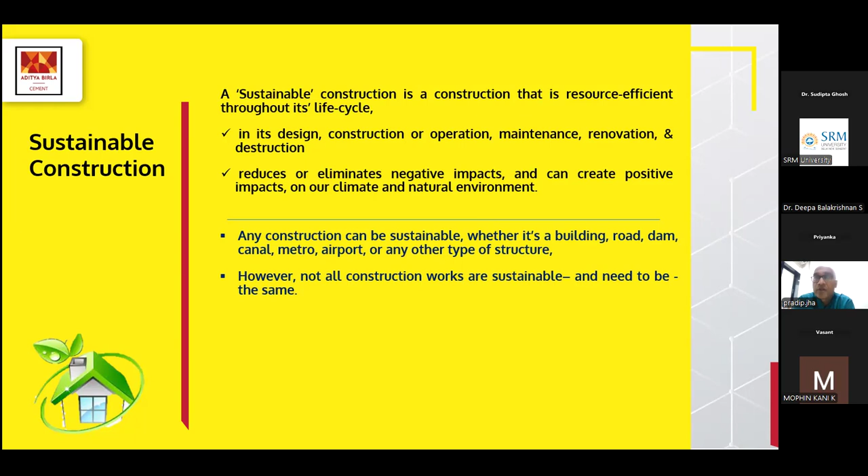Any construction can be sustainable, whether it is a building, roads, canals, metros, or airports—whatever construction we do, it can be sustainable. But it is not necessary that all the construction that we do has to be sustainable. So that is the key point.

The third point is, sustainability is very subjective. So what is sustainable in the Northeast may not be sustainable in the coastal areas. What is sustainable in India may not be sustainable in any other part of the world. Every part of the world has distinctive climatic conditions. They have unique cultures, their traditions are different, and their construction types are very different. Their exposure to environment is very different. Their economical and social priorities are different. And that is how sustainability gets impacted when we change locations and when we change places.

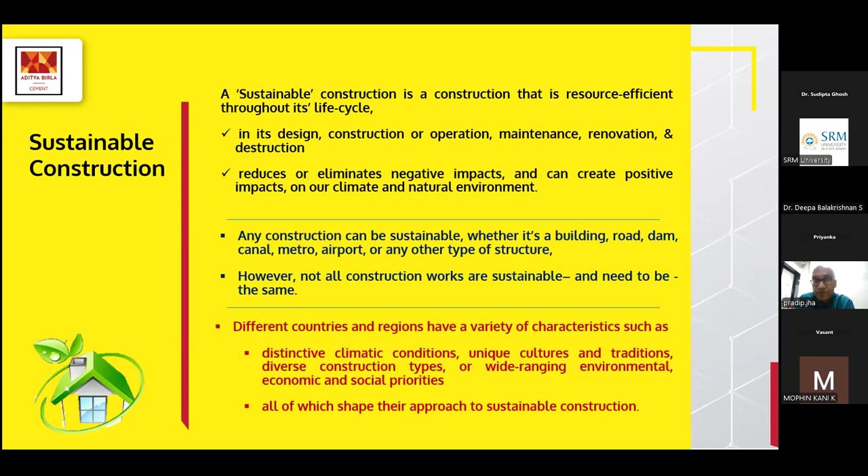These are the basic principles of sustainable construction. Whenever we speak of sustainable construction, the prime motto is that it has to have a very positive impact on the environment. The natural resources we use for sustainable construction have to be efficiently and judiciously used. If we can make use of resources efficiently, it culminates into sustainable construction.

When we speak of sustainable construction, we have to speak of a life cycle approach. When we design, it has to be sustainable in our mind. When we construct, the sustainability factor has to be crept into it. When we are operating with those structures, living with them, it has to be sustainable. So from design to demolition, every stage of the life cycle has to be sustainable.

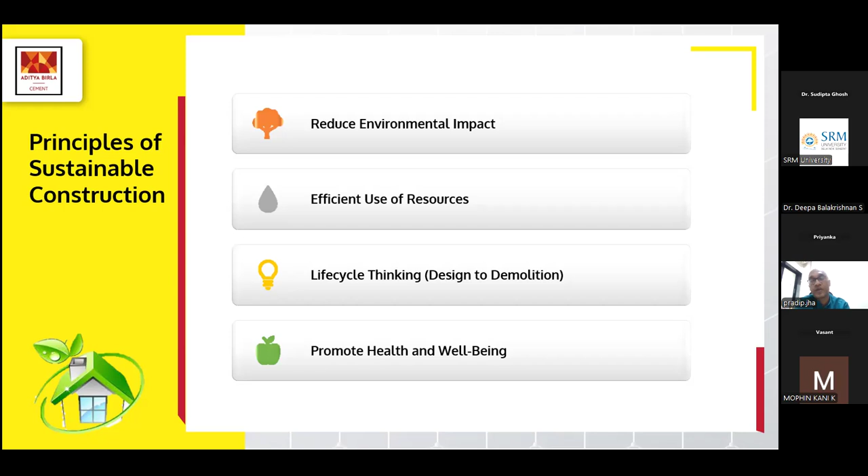Finally, for the ones who are using it and the surroundings, sustainable construction needs to promote health and well-being of the occupants as well. So when you build a green building or sustainable roads, whoever the users are, their health, wealth, well-being and safety come into paramount importance.

So these are the triple bottom lines, and this can't be negotiated. When we speak of sustainable construction, it has to reduce waste, it has to reduce emissions, and that is how it has a positive environmental impact.

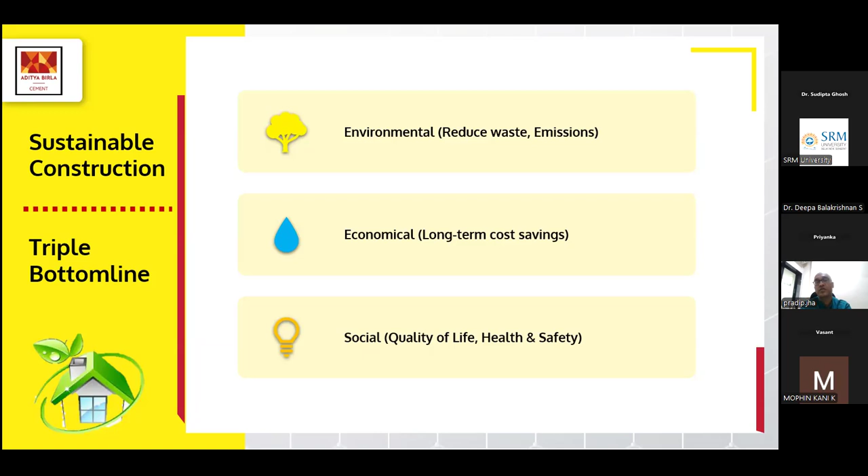In the long run, if it is not economical, it doesn't make sense. So sustainability has to be socio-economical. The social aspect implies the social structure, the quality of life of society, and the health and safety of occupants. And economical means it has to have some sort of savings, which can come in terms of many factors. So these are the three bottom lines: environmental, social, and economical. These three bottom lines have to be considered when we speak of sustainable construction.

Now, since we are civil engineers, we are into the construction industry. What is the impact that the construction industry is doing to the environment today? Let us have a look at it.

There is a forum called World Watch Institute, and this forum says the construction industry consumes 40% of the world's raw stones, gravel and sand. The construction industry consumes 25% of the virgin wood per year. Similarly, for energy and process-related carbon dioxide emissions, the construction sector is responsible for 39%. That is very huge. And of the waste produced, 59% is construction and demolition waste.

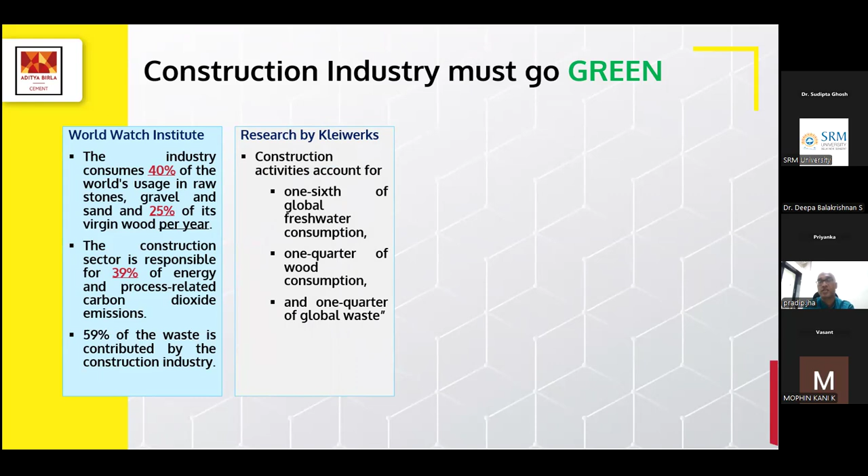This is what World Watch Institute says. Other research by Kleiwerks says that of whatever fresh water we have, 16% of global fresh water consumption is being done by construction activities. That's very huge—when we are deprived of fresh drinking water, 16% goes to construction activities. 25% goes to wood consumption, and 25% goes to global waste.

Now, this construction blog data shows that of whatever air pollution we have, 23% comes from the construction sector. The construction sector contributes 50% of climatic change. Drinking water pollution again 40%, and landfill waste is 50%.

Just a minute, I think I have... is my screen visible? Yes, sir. Where has my screen gone? I'll just reshare again. I think it's visible now. No, sir. Now it's visible, sir.

Visible? Construction industry—again, the US Green Building Council says the construction industry accounts for 40% of worldwide energy usage, and it is going to grow every year by 1.8%.

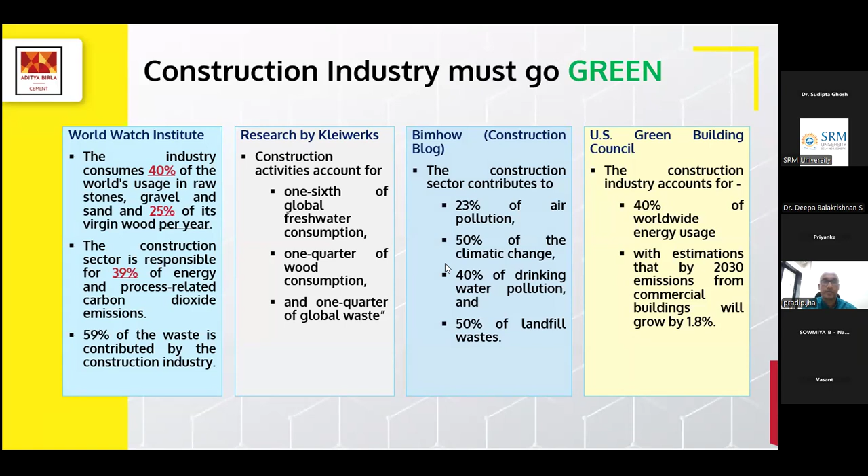Now, we are into the cement industry, and cement contributes a lot to construction, so let us have a perspective from the cement industry. India has an installed capacity of 590 million tons, while the world has almost 4.2 billion tons. We are the second largest cement producer in the world after China, contributing 7% of global installed capacity. Our per capita cement consumption is only 250 to 270 kgs, whereas the global average is 500 to 550 kgs, and China accounts for 1750 kgs.

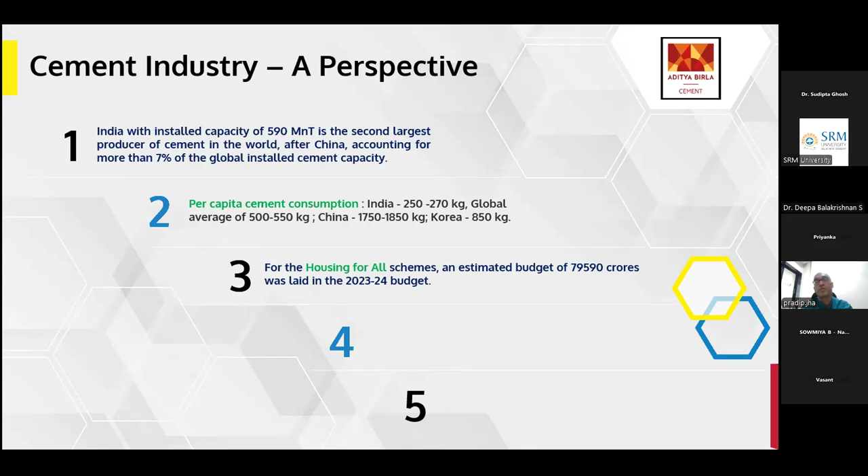If you see the budget every year, there is a huge allocation for construction activities by the government. Housing is one of the sectors—affordable housing is one of the sectors. So housing for all is Pradhan Mantri Awas Yojana Urban, and similarly you have Pradhan Mantri Awas Yojana Rural, with a huge amount allocated to this.

And we all know that for every ton of cement produced, 1 ton of greenhouse gas emissions is released. Also, for every ton of cement we produce, around 6100 megajoules of energy is consumed. So that is the amount of energy and resources that cement consumes.

There are many improvisations in cement manufacturing. Supplementary cementitious materials, industrial byproducts which have cementitious properties, are being used, and fly ash is one of those. Around 58 million tons of fly ash was used, and the contribution of slag in cement production has now increased to 57%. We have slag cement, composite cement, amendment number 1 - these use fly ash and slag as well. PPC is only fly ash based. So these two blended cements make use of industrial byproducts for the betterment of the environment, for making cement greener.

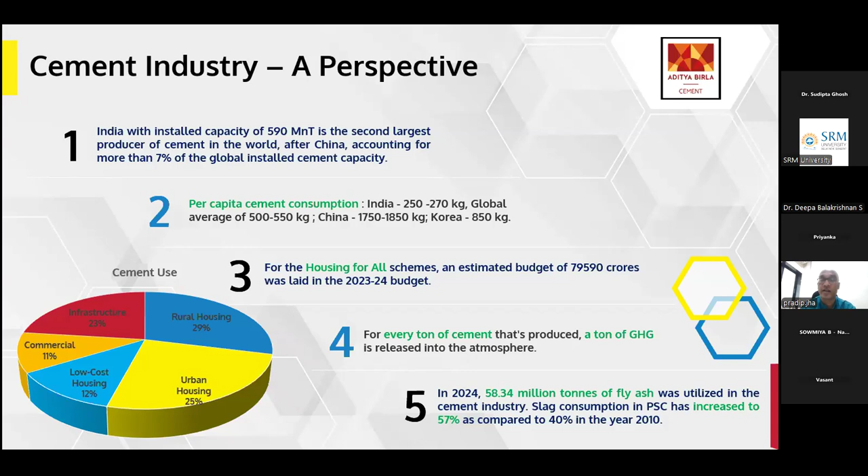Where does the cement go? Rural housing accounts for 29% of the cement used, urban housing 25%, and low-cost housing 12%. So in the housing sector alone, around 66% of the cement is getting used. Apart from that, there are commercial buildings and infrastructure projects as well.

When we speak of cement, we say concrete. Concrete is the second largest material used, and every construction that we think of comprises concrete. This is the scope of concrete, and it's very huge. This is just a context setting of why sustainability in civil engineering matters.

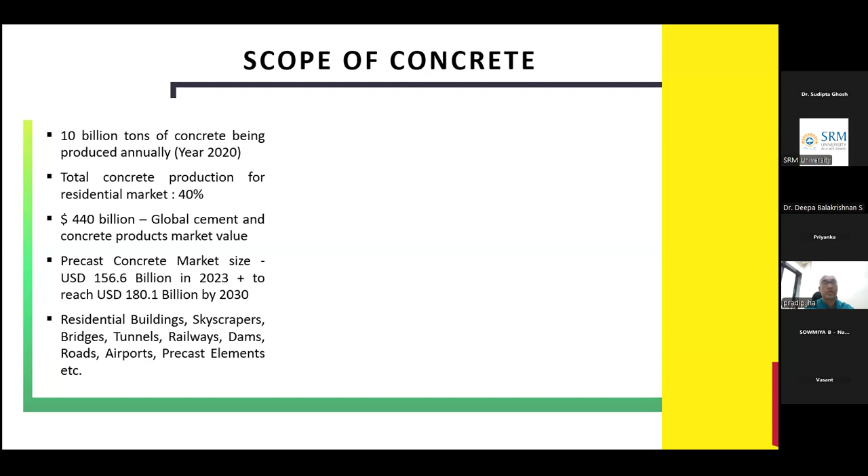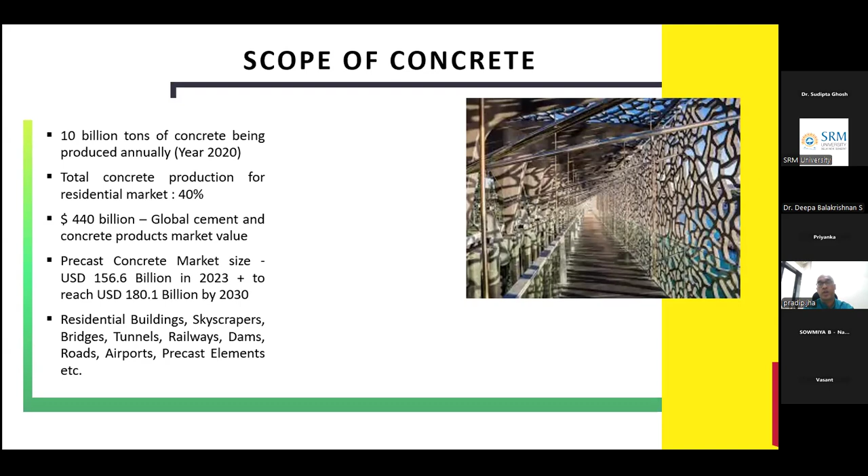Concrete today, there are many types coming into picture - precast concrete, value-added concrete, and the concrete industry is getting bigger and bigger. Concrete production is getting very huge, and later in the slides we'll see the volume coming into picture. There are different types of concrete we produce for our structures - it could be precast concrete, concrete over bridges, concrete in a modular shape, or concrete with an entirely aesthetical look.

Water is again one of the prominent ingredients used for construction, and if we speak of sustainability, we can't ignore water. In the next 15 years, India will witness around 30 billion meter square of construction area in urban areas alone.

RMC plants in India normally produce 100 to 120 million cubic meter of concrete per annum. This is only 10% of the concrete that we use, so the total must be around 1,000 to 1,200 million cubic meter of concrete per annum. For these RMC plants, we require 35 to 42 billion liters of water for that 100 to 120 million cubic meter of concrete. So total water requirement in concrete alone in India is 350 to 420 billion liters per annum.

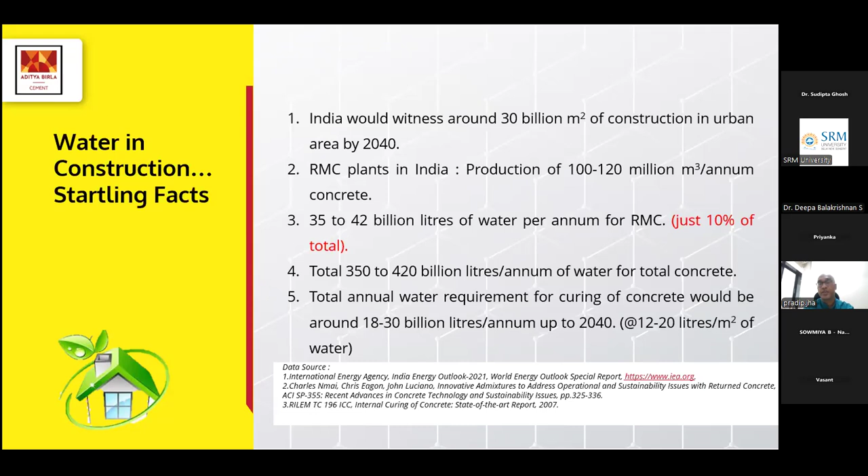This is only for making concrete in RMC. We also require water for curing of our construction - I'm speaking only of curing of concrete, and that is around 18 to 30 billion liters per annum that will be required in the next 15 years. So this is the amount of water we are using for construction every year. There were three things I wanted to bring here - cement, concrete, and water in concrete - and these are very startling.

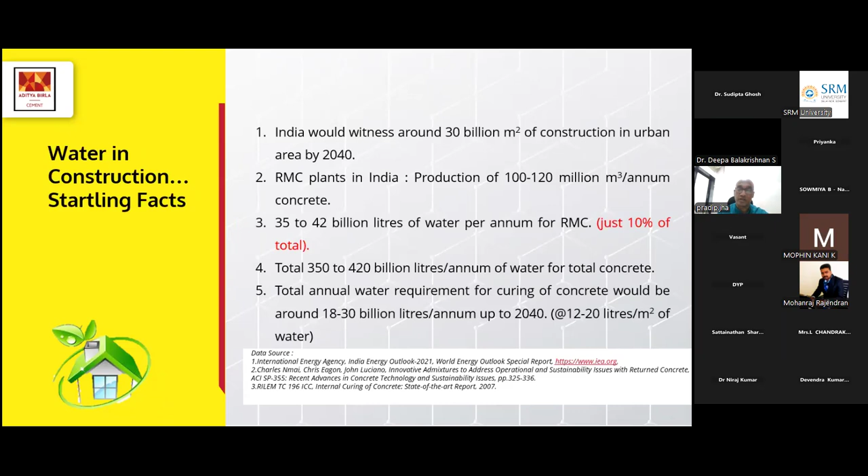When I speak of sustainable construction, I'll focus more on green products and materials - cement is one of those, and concrete today is a product itself. There are also many building products that have come into picture, which I'll speak on as well. The second part would be green practices - what makes my construction green and sustainable, like rainwater harvesting, solar energy, energy efficient designs, and construction demolition waste. Finally, we'll speak of green buildings, since buildings are one component of sustainable construction, and how we promote IGBC certification in different categories.

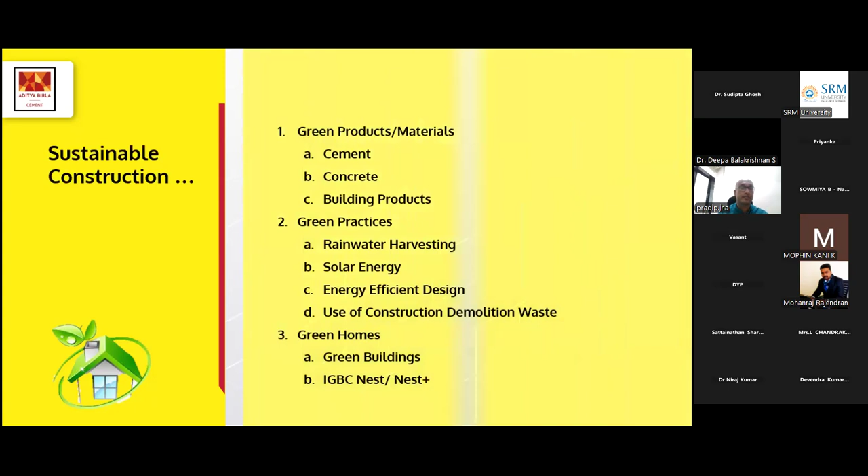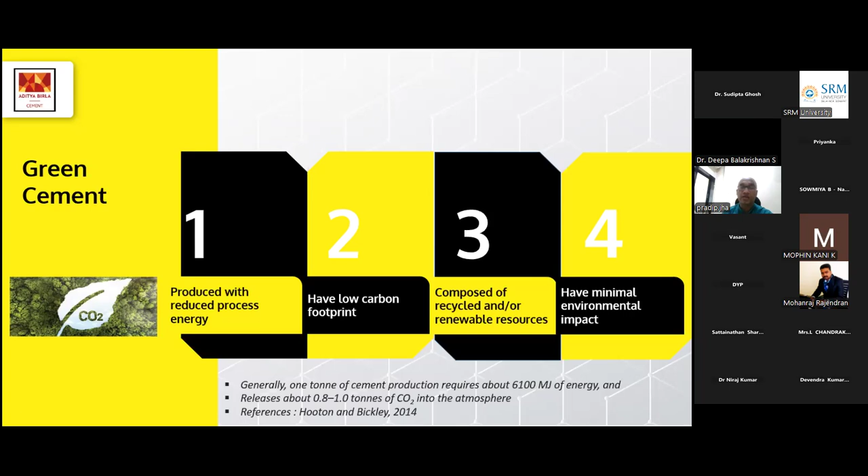By green cement, we mean cement produced with reduced process energy. I've already said 1 ton of cement requires 6100 megajoules of energy and releases about 0.8 to 1 ton of CO2 into the atmosphere. Green cement is cement with a low carbon footprint, composed of recycled and renewable resources, which have minimal environmental impact. When you use blended materials, blended cement, supplementary cementitious materials, or alternative sources of fuel, you make green cement.

Now, why we say Ultratech cement is a green cement? Because we are 5x water positive. That means whatever water we consume in producing cement, we conserve 5 times more than that. We reuse, we recycle the water 5 times whatever we use. We are also plastic negative.

So when I say plastic, what happened? This plastic negative means we don't produce plastic, but we use plastic as fuel material and in every other thing that we use. That is why we are 2.8x plastic negative.

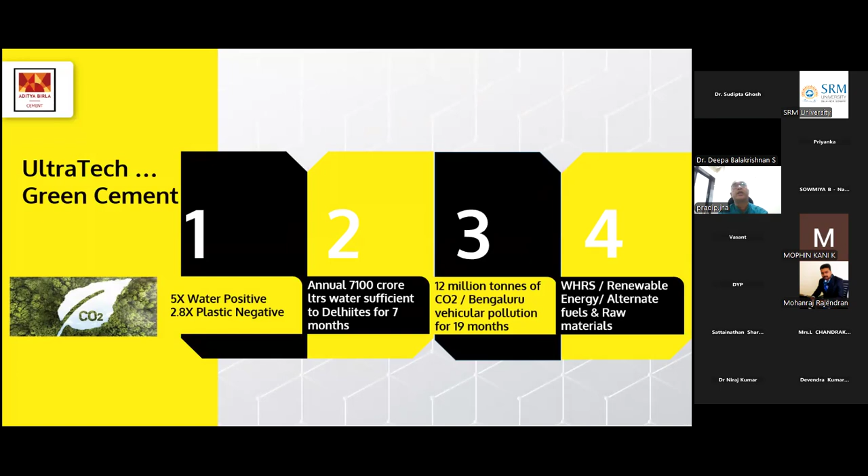Now I'll tell you the amount of water that we contribute to the society. Every year we preserve, we harvest 7,100 crore liters of water. And what does that amount to? For the entire population of Delhi, whatever drinking water they require for 7 months, this 7,100 crore liters of water is sufficient.

Similarly, we reduce carbon dioxide emissions to the tune of 12 million tons. And what does that amount to? Entire Bangalore's vehicular pollution, whatever emission they do for 19 months, we reduce that emission every year, every 12 months.

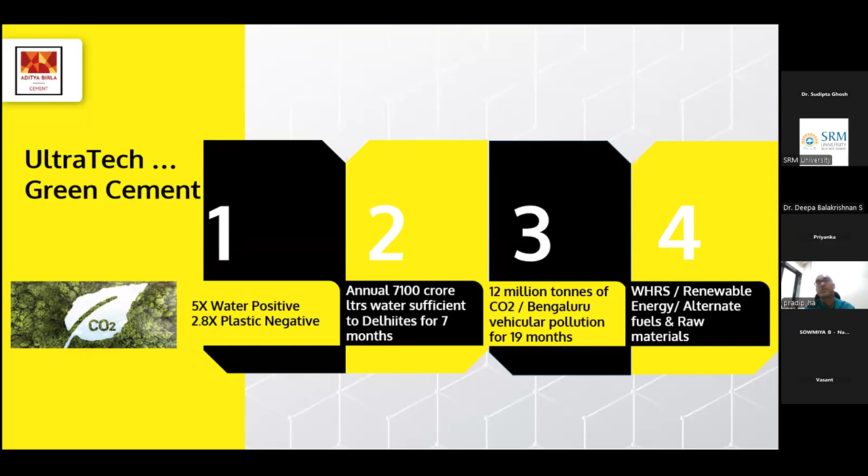Now, we are energy sensitive, we are very energy efficient, and for that we have waste heat recovery systems in place. We have renewable energy in place, use of renewable energy in place. We make use of alternate fuels, and we have alternative raw materials as well. That is why we say we are green cement. Today, whatever cement we produce, 70% of the cement is green cement.

Again, I'm speaking of concrete. So when I speak of concrete, I say ready-mix concrete. And ready-mix concrete is green concrete. Why? Because obviously it makes use of efficient resources.

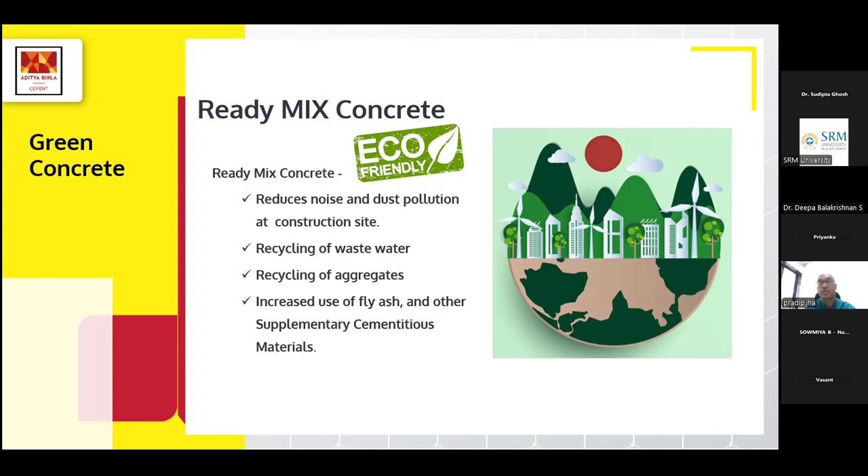So ready-mix concrete is normally designed concrete. You put into place concrete mix design principles, and that is how you optimize the resources that you use. Secondly, you recycle wastewater and use that water there. Third, the aggregates, at times you recycle aggregates and then use them. You make use of supplementary cementitious materials, and that is engineered. Also, the noise pollution and dust pollution at the construction site gets reduced.

So that is how ready-mix concrete is green concrete. Now, this is again why I'm saying, obviously, as civil engineers, when we are commuting, we see many transit mixers on roads. That is an indicator that today ready-mix concrete is gaining pace very quickly. It is gaining acceptability in a wider way, from all the corners.

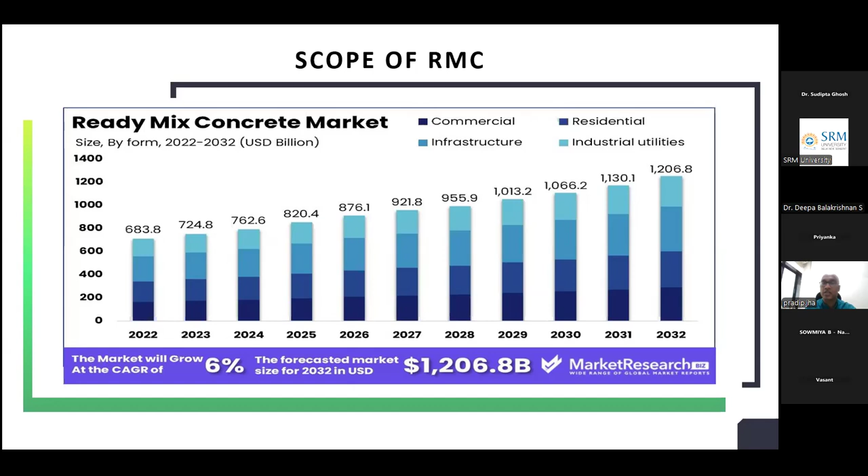Initially, only institutional customers used to make use of ready-mix concrete. Today, even a normal house builder, a normal citizen, when they want to make a house, they ask for ready-mix concrete. So this market is getting huge. You can see in billions how the size of ready-mix concrete is growing day by day, month by month, and how it intends to go ahead. So in 2032, 7 years down the line, it is projected to be a market of $1,206 billion. And it is being used in commercial, infrastructure, residential, industrial utilities, and many more.

So when we say ready-mix concrete, there is one more concrete, not only ready-mix concrete. Concrete normally we say is against the environment, but we saw the importance of water, why the water needs to be preserved, why the groundwater should be prevented from depleting.

And that is where this pervious concrete comes into picture. So we design concrete to let water go inside. Whenever you want to design your patios, your walkways, pathways, you make pervious concrete so that it suffices the need of concrete, and simultaneously it allows the groundwater, surface water to percolate inside the local land, avoiding any depletion of the groundwater table.

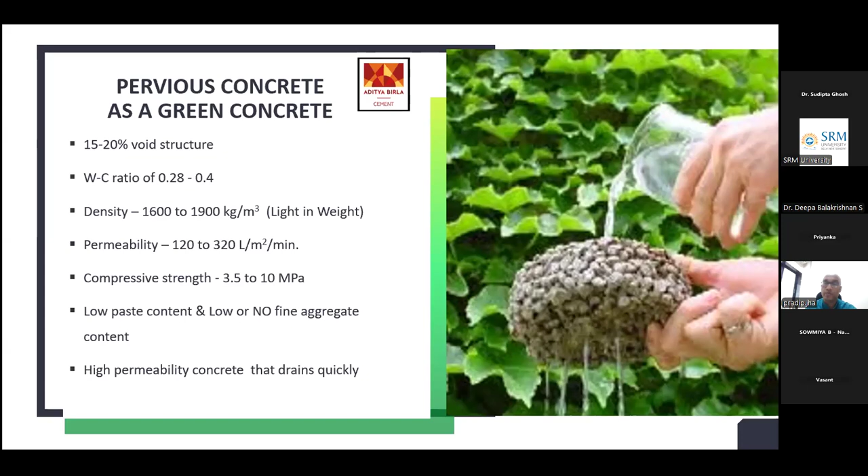So I'm not going into technicalities, but this concrete is designed to let water permeate in the ground. A small video.

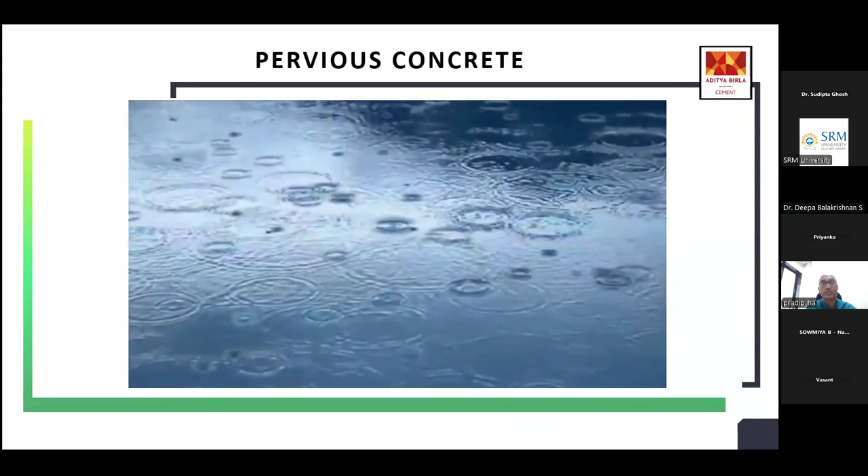Stormwater runoff occurs when rain falls in urban areas. This runoff can cause increased pollution in rivers and streams, flash floods, and loss of rainwater that replenishes the water table and aquifers. By capturing rainwater and allowing it to seep into the ground, pervious concrete is instrumental in recharging groundwater and reducing stormwater runoff.

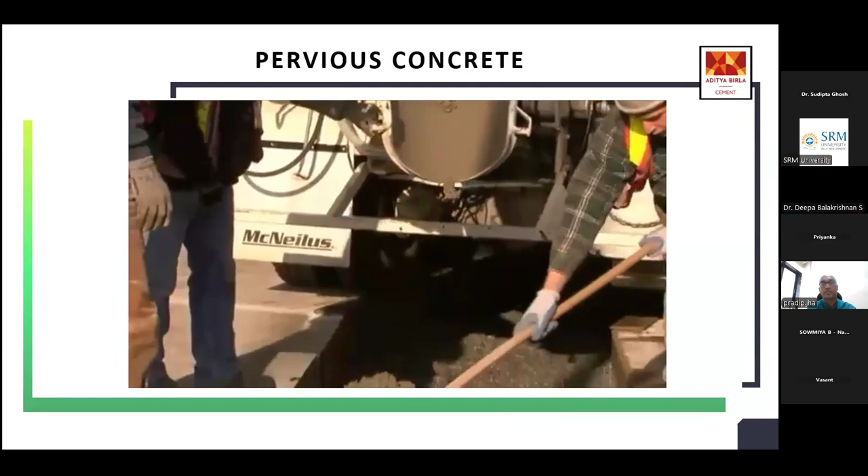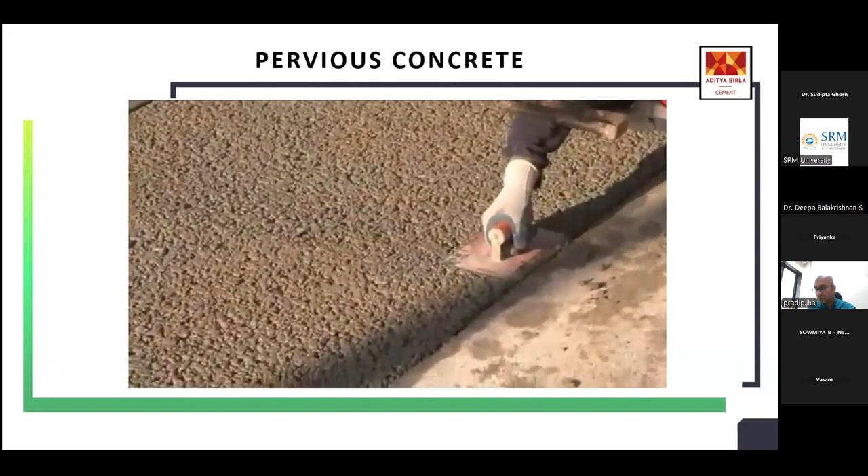Pervious concrete is a carefully controlled mixture of mainly coarse aggregate, cementing materials, and water. The reduced sand content results in a pavement with a high void content, allowing water to pass freely through it, putting rainwater back where it belongs, in the ground.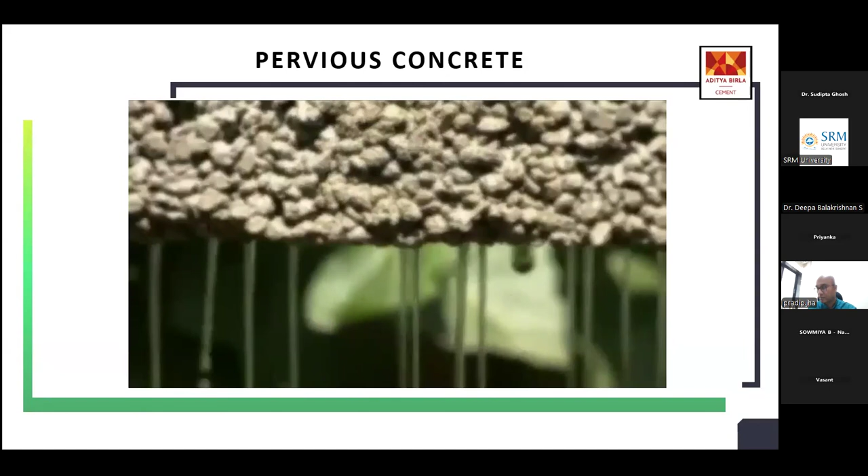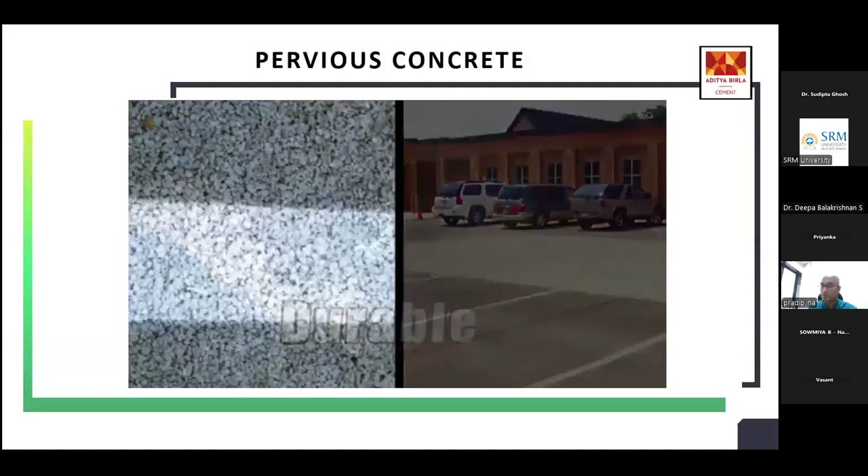Pervious concrete has a 15 to 25% void structure, with flow rates of 200 liters of water per minute for each square meter of pervious pavement typical. Pervious concrete is a durable material, used for low-volume streets, driveways, sidewalks, and parking lots throughout the Pacific Northwest. It has also been used in freeze-thaw conditions for over 15 years, with technical and design expertise available to ensure optimal performance in freeze-thaw applications.

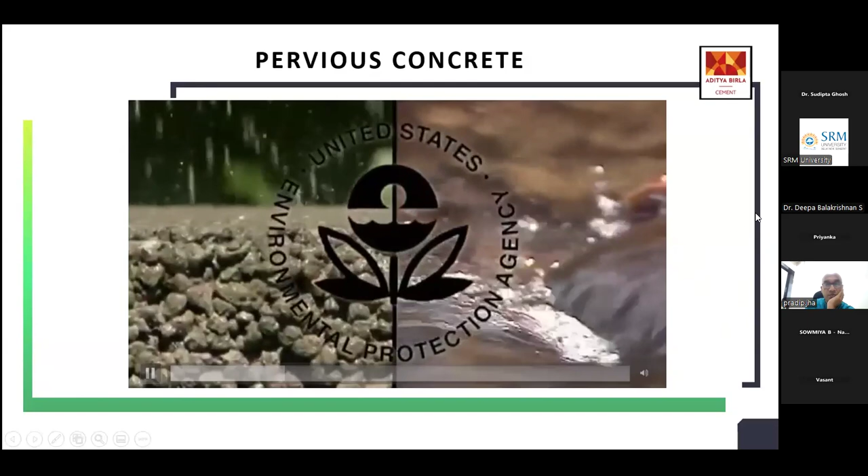Pervious pavement is a best management practice recommended by the U.S. Environmental Protection Agency.

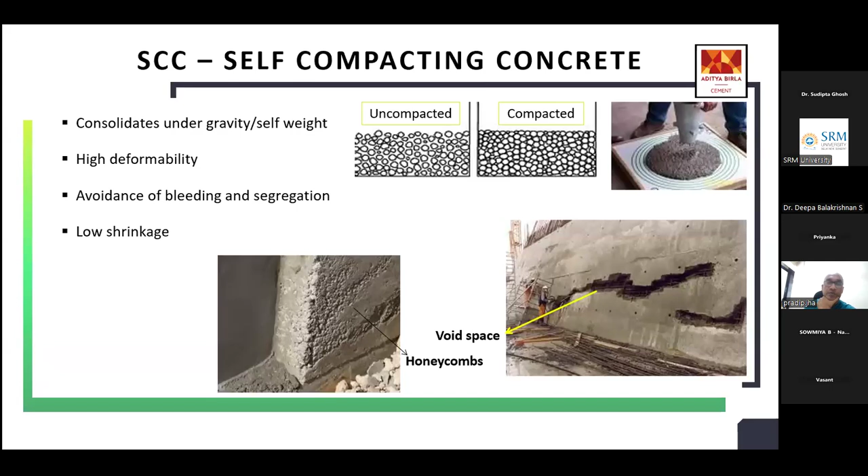The second in line is self-compacting concrete. As we all know, normally we add much more water at site, which is not desired. This concrete makes use of viscosity modifying agents and high range water reducers, and this is how it makes durable concrete. It helps us.

This is an example of self-compacting concrete. If you see, the noise pollution is very less, the use of water is less, so we have sufficient workability and pumpability. The use of machines and resources are also very less.

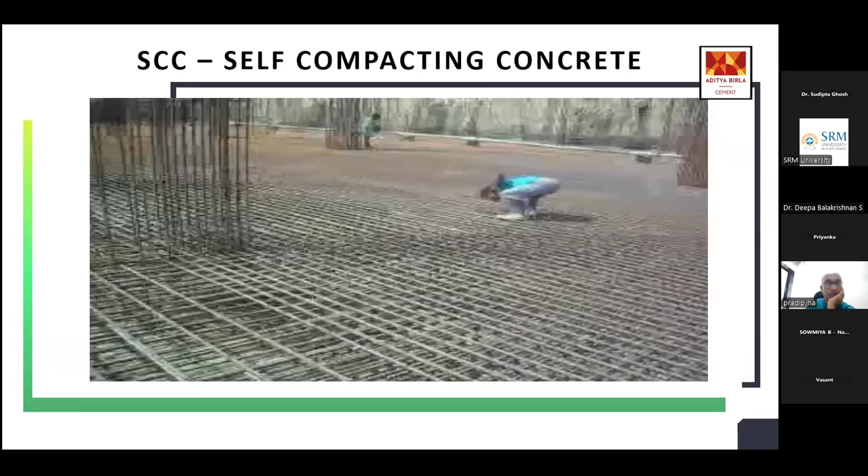Now, we spoke of cement, we spoke of concrete, we spoke of two special concretes, that is pervious concrete and self-compacting concrete. Now, there are certain products in the market, and those products are Green Pro certified products. So whenever a product satisfies the parameters of this Green Pro certification, they get this certification as well.

So we have building blocks. Normally, conventionally, we have been using clay bricks and other bricks as well. Today we make use of AAC blocks. AAC blocks, if you see, don't require soaking, while in normal conventional clay bricks, we require soaking of bricks. So that is where you save water.

These AAC blocks have great precision. We can cut these blocks through our hacksaw, so the waste is very less, and optimal use of materials can be there. The second is we have these dry mortars, dry jointing mortars.

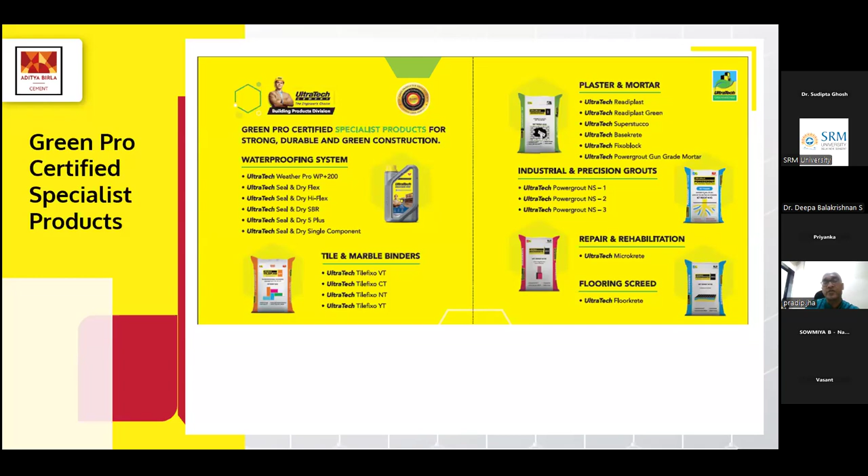Now the third part: normally today there is a lot of tiling work in progress, and when we do conventional tiling works, we make use of many natural resources. The conventional mortar is very thick, and it is not very durable, nor does it have longevity. So today with Tilefixo or other adhesives, those adhesives are very thin, so your material requirement is very less, and apart from that, it is very sturdy as well.

Apart from this, we have waterproofing systems, and these waterproofing systems work on optimization of water content, and that is how these products are Green Pro certified specialist products.

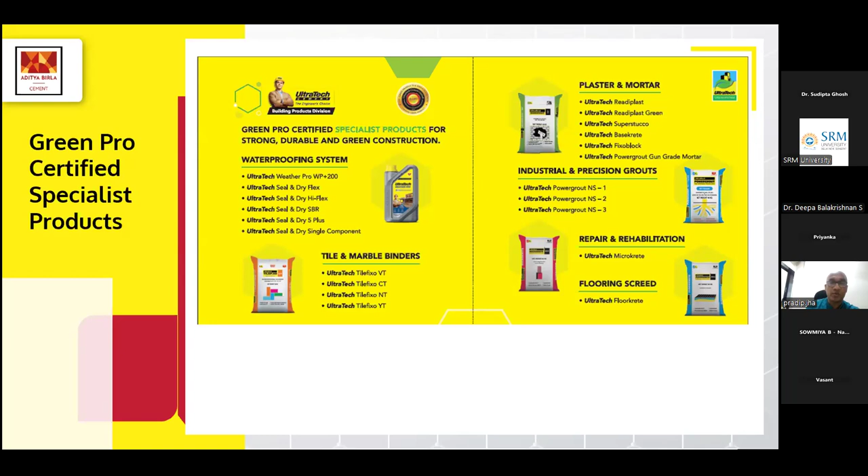Now, construction practices - today in civil engineering, you see many houses where solar panels are being installed, and rainwater harvesting is being done. We know rainwater harvesting has a huge scope, and today every design a civil engineer or architect does, they have to put rainwater harvesting systems into place. Else, the authority doesn't approve those plans for construction.

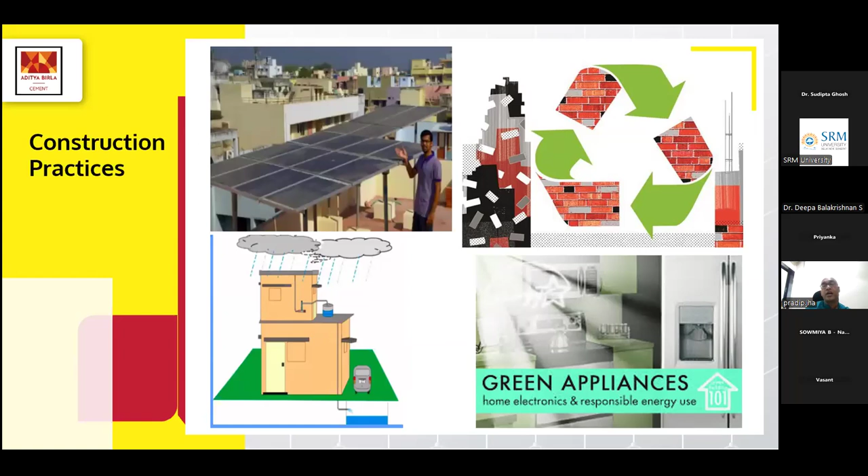Barring this, if you go to the market, there are many faucets, appliances, gadgets which have energy efficient ratings - faucets that use less water, that are environment friendly and eco-friendly. The energy consuming appliances which save energy and save money from your pocket in the longer run - those green appliances and faucets are also abundantly available in the market today.

Now we spoke of everything, but now 2-3 slides will be speaking on green buildings only. Green buildings are based on the concept that it conserves natural resources, it uses less water in operation, it optimizes energy efficiency. So whatever energy we make use of in our houses, it has to optimize that. It has to generate less waste, and it has to provide healthier spaces.

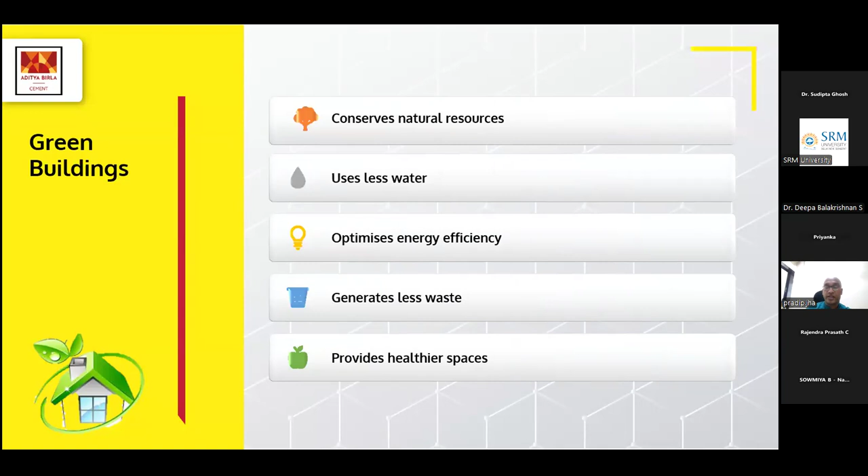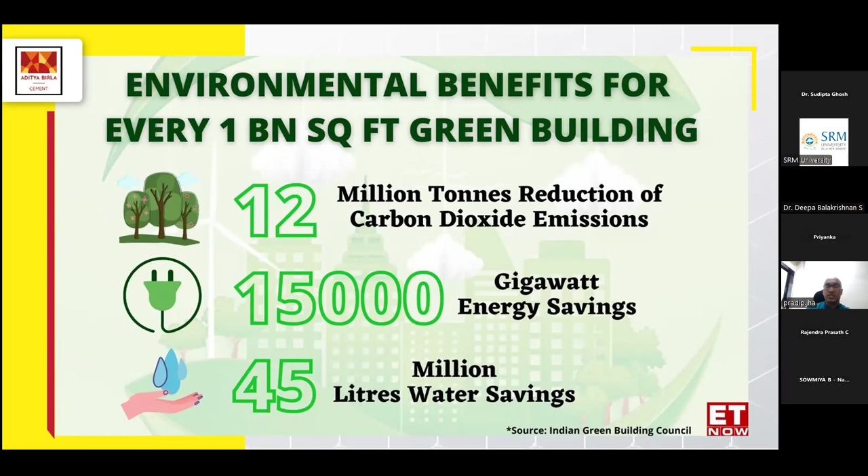These are the environmental benefits for every 1 billion square feet of green building that we make. The carbon dioxide emission is reduced by 12 million tons. Every 1 billion square feet of green building that we make, we save 15,000 gigawatts of energy. And every 1 billion square feet of green building that we make, we save 45 million liters of water. The source of these facts is Indian Green Building Council, an authority in green building.

Green buildings have economic benefits, environmental benefits, and social benefits. If you see social benefits, workers who work in green, well-ventilated offices have 101% increase in cognitive scores. They have a very good quality of sleep. If you see their performance, it has increased up to 8%. Environmentally, in terms of energy saving, they can save 40 to 50% of energy, and they can save water to the tune of 20 to 30% compared to conventional buildings.

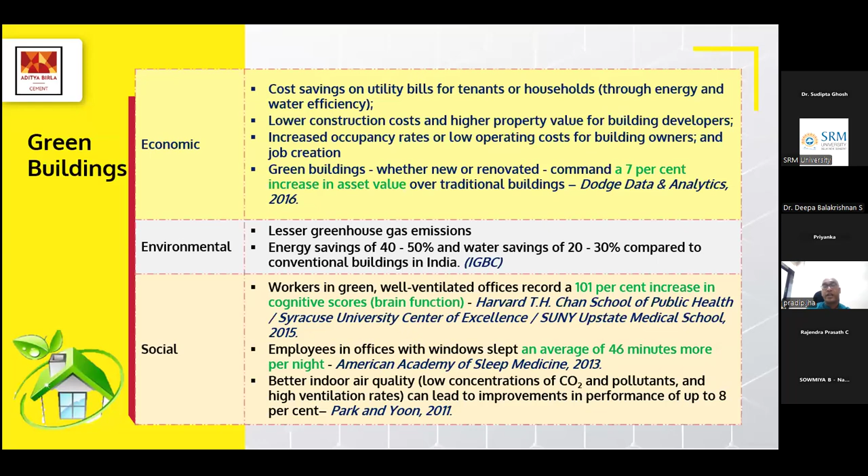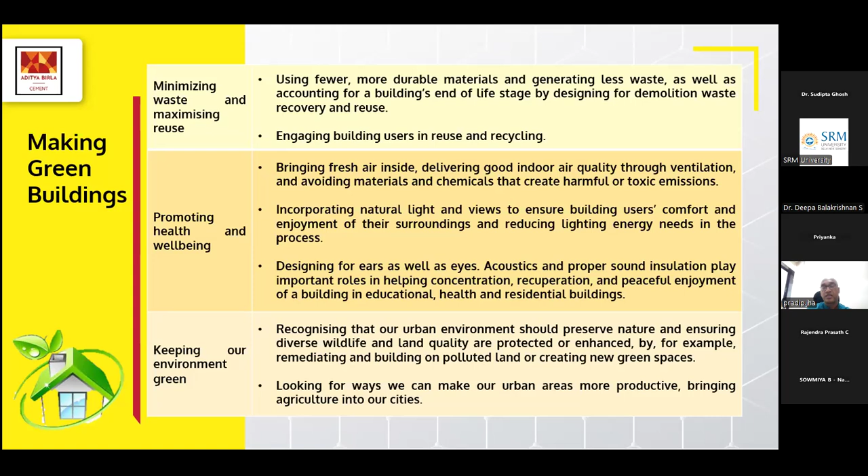Normally it is seen that if you make green buildings, your asset value is increased. People tend to rent such buildings which are green. And how do we make it? We minimize waste, we maximize reuse. Green buildings are very good for the health of occupants, because of fresh air, natural light, natural views, and acoustic design for ears and eyes. So these are the things that help green buildings make a productive and better efficient society.

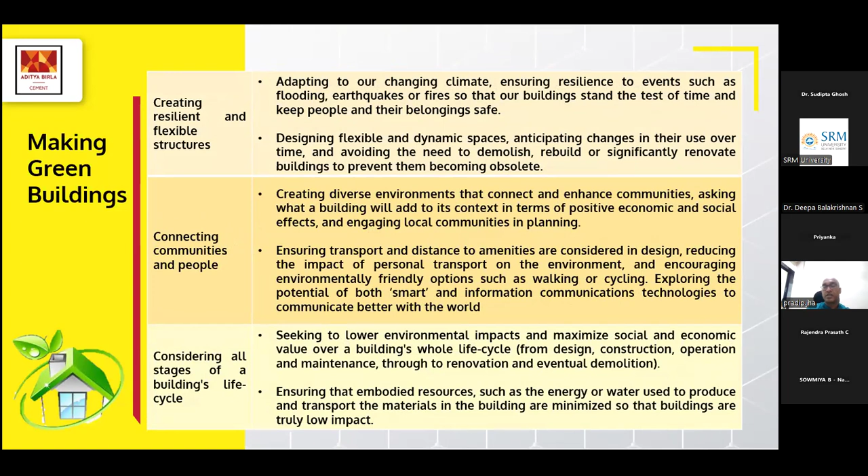Green building is based on considering all stages of a building's life cycle - from design to construction to operation, maintenance, renovation, and eventually demolition. If you go to any city, especially Rajasthan, where erstwhile Maharajas were there, those Havelis, those forts have been converted to restaurants, converted to big hotels. This is what adaptive reuse means. Rather than demolishing those structures, they have been adapted to be reused. And that is how you avoid demolition waste, and that is how you avoid wastage of resources as well.

So you don't need to make new construction. You limit the waste generation. You preserve your historical and cultural heritage, whereas you revitalize the communities, the older historical monuments, and we make use of that. This is one of the assets, the fact.

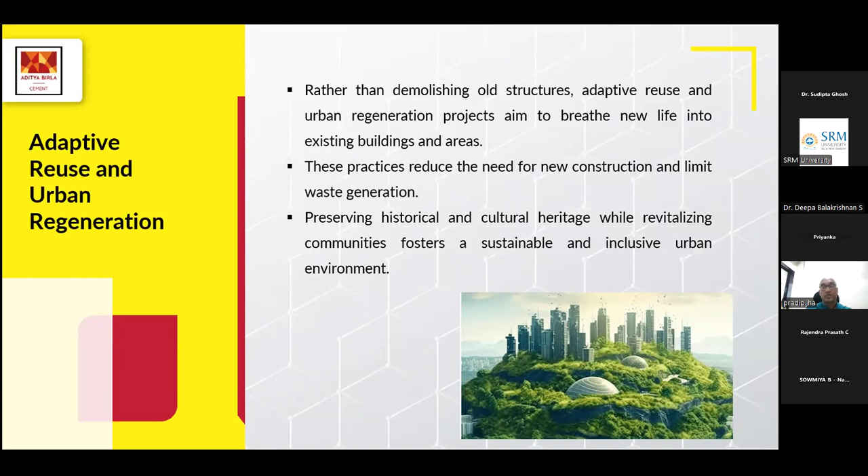Now, we at Ultratech also partner with a lot of people who want to have their homes green building certified. For normal home builders, there are two certifications - one is IGBC Nest, the other is IGBC Nest Plus. Ultratech Cement partners with IGBC and normal house builders in getting those houses certified if their houses meet the parameters of IGBC certification. And we have done a lot of them.

I think this is what I had to offer. So when we speak of sustainable construction, we speak of energy efficiency, we speak of eco-friendliness, we speak of green cement, we speak of green concrete, we speak of durability, we speak of creating a sustainable future, we speak of being water positive, we speak of lowest carbon footprint, and a lot of other things. That is what I have to say. Thank you from my side.

Imagine waking up every morning in a house that can breathe and knows how to take care of you and your family. This was the dream of 36-year-old Varun Sharma, who struggled in a city full of traffic and noise and often thought he didn't have any choice. But one fine day in the same city, Varun and his family saw his dream house. This was his colleague Sudhir Mishra's house, which, although located in the city, seemed to be different. Sudhir had his own reasons to build such a house.

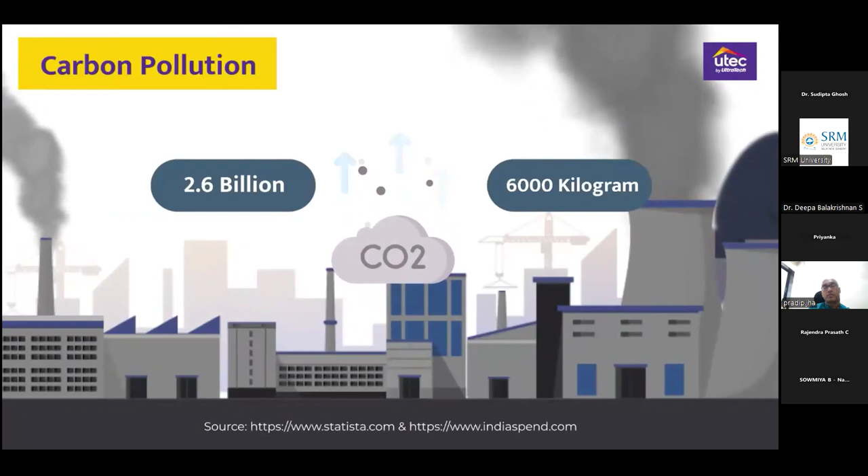Carbon pollution - every year in India, around 2.6 billion metric tons of carbon dioxide is emitted into our environment, and any city home emits around 6,000 kgs. Power crisis - every city dweller is struggling with increasing electricity bills and power cuts. Water crisis - water sources are limited, but the population is increasing at a rapid rate.

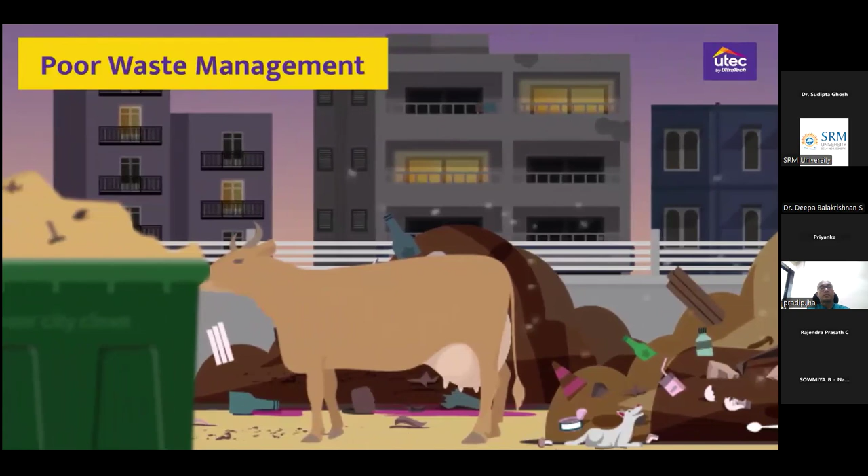Poor waste management. A normal city home has no means of disposing its own household trash. But Sudhir's home was an answer to all these problems, because it was a green home.

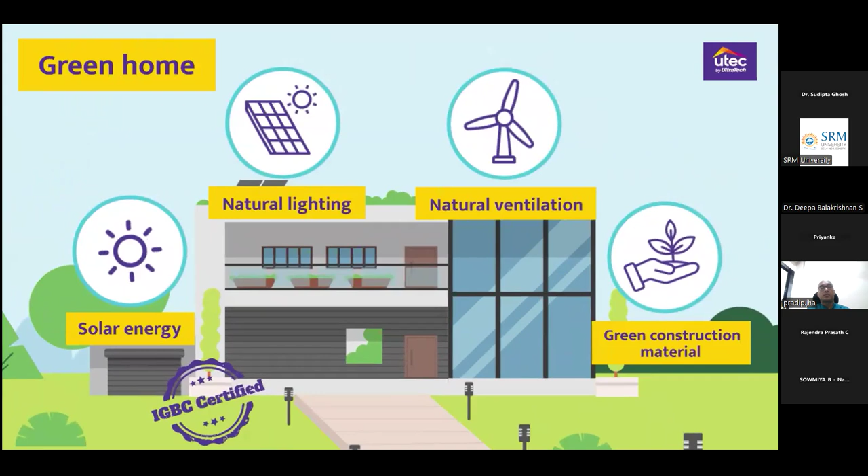Green homes are homes that are designed to be eco-friendly. A green home uses clean solar energy to generate electricity. A green home, by its natural lighting and ventilation system, keeps the house full of light and enhances the indoor environment quality. Special rooftop gardens in a green home ensure better insulation and cooler homes.

And residents' water requirements are ensured by an effective rainwater harvesting system. Varun realized now that building a green home isn't just his dream, but also his responsibility for the well-being of the environment and his family.

What Varun required was an expert, and that expert came in the form of the UTEC app by UltraTech, which has developed a unique one-stop solution platform to provide all the necessary resources, guidance, and information to build a green home. With every small step, UTEC and Varun systematically moved towards achieving a sustainable green home.

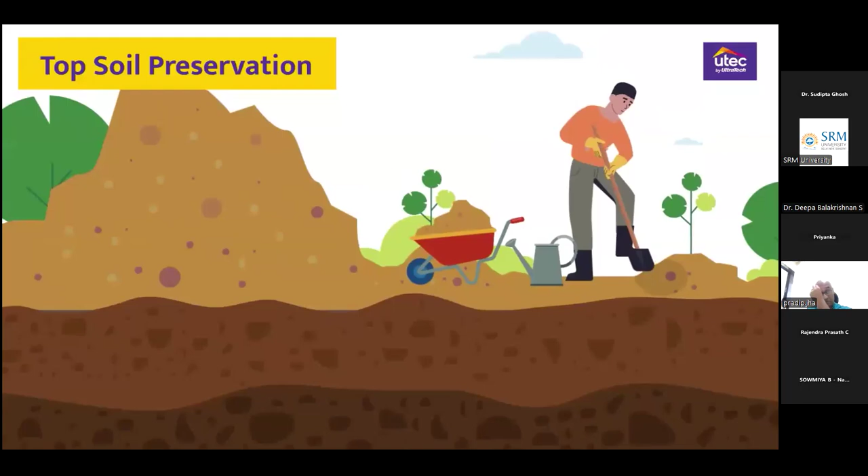This started with choosing the right location to build a new home, preserving the nutrient-rich topsoil and later reusing it for landscaping, building a water harvesting system to ensure 1,000 liters of rainwater for every 1,000 square feet area of the house, installing solar panels and solar water heaters for the households, and check-marking all the rules and guidelines of the IGBC checklist.

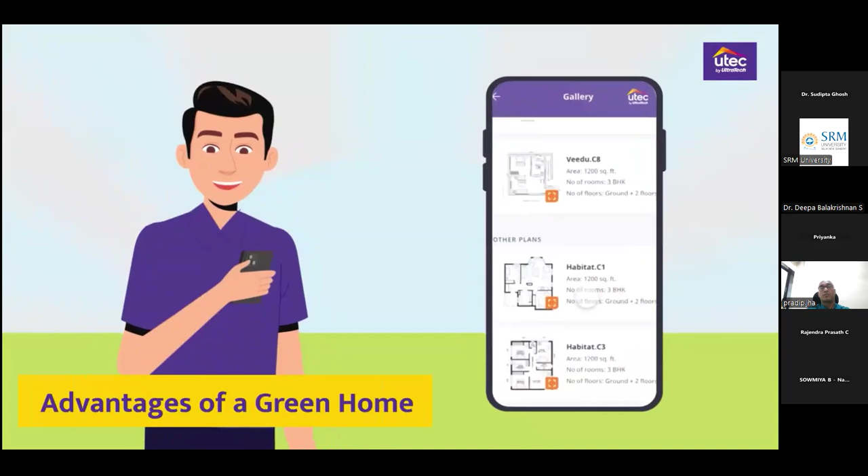Varun could now see a significant difference in his new home as compared to his earlier conventional city home, like the use of certified green construction materials, energy-efficient fly ash bricks, blended cement, and eco-friendly VOC-free paints, tinted windows with sunshades to keep the house warmer in the winters and cooler in the summers.

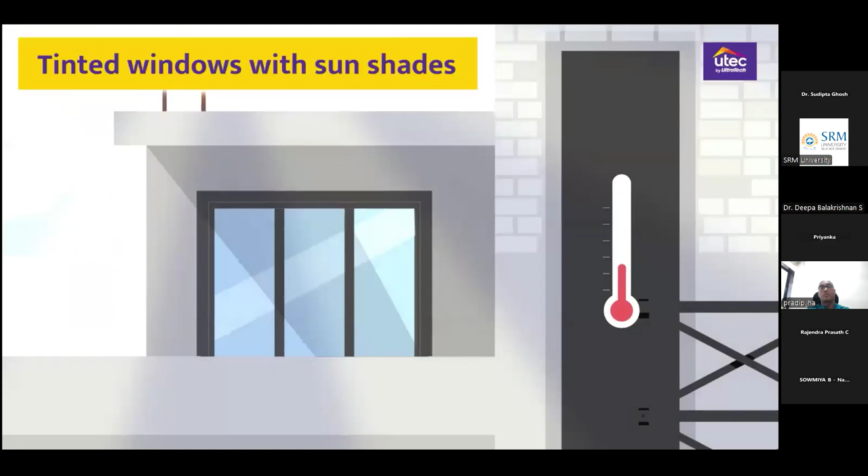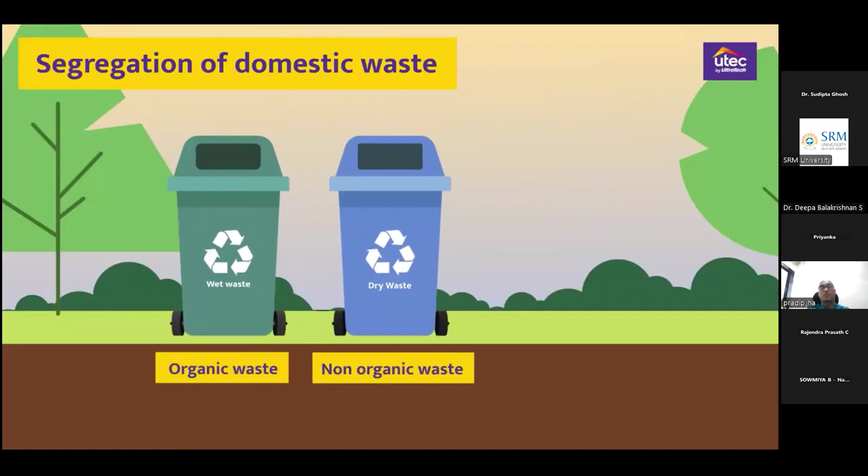Energy-efficient electronic appliances were installed. To shield the house from intense sunlight, white-colored tiles and reflective paints were used on the roofs and the walls. Two separate boxes were introduced for disposing organic and non-organic waste and a compost pit for easy disposal of domestic waste.

With UTEC's assistance, Varun and his family turned their green home dream into a reality. And as a recognition of their effort, they were awarded the Green Home Owner Certificate by the IGBC.

For the Sharma family, the green home benefits continued to accumulate. Within just one year, Varun saved 30% of his electricity and 50% of his water bills. Also, the value of Varun's green home increased significantly as compared to any traditional city house.

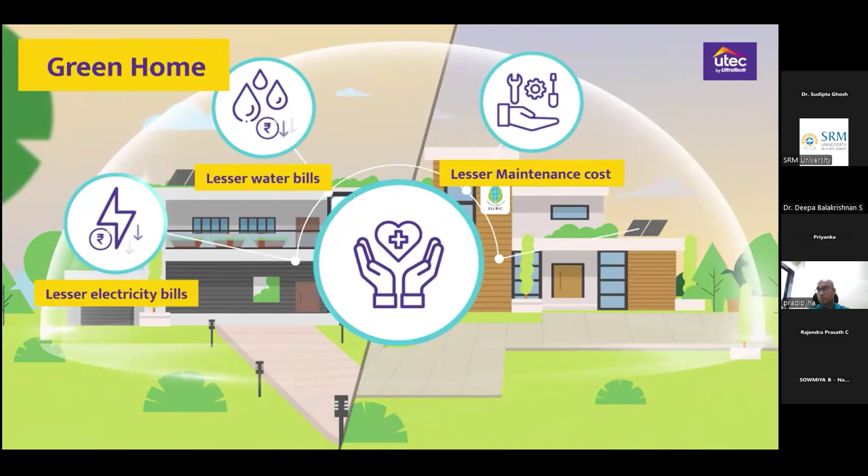Varun's and Sudhir's green homes are not just homes, but also a natural protective shield for each home dweller, providing a clean, healthy, and joyful living environment to all. So if you wish to build a new home, then Green Home will guarantee you lesser electricity bills, lesser water bills, lesser maintenance cost, eco-friendly living, and a promise for a healthy and happy life.